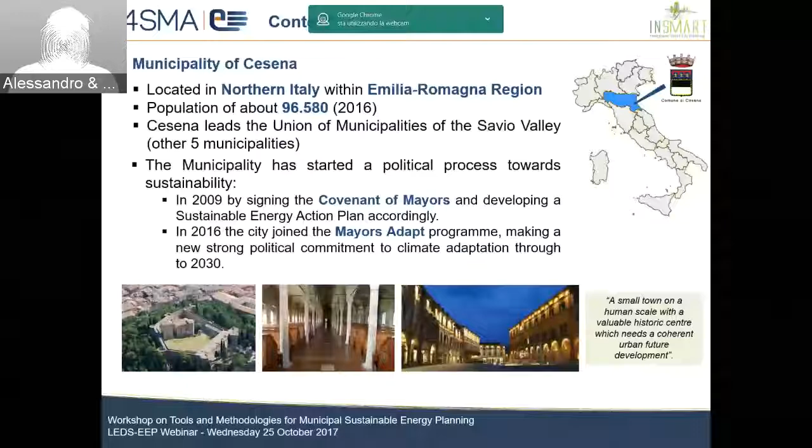So this was basically the starting point: a city which already started its process and was open to try to apply different methodologies for sustainable energy planning. As discussed in the previous webinar, the core of the InSMART methodology is the development of a city planning platform, which is composed of a number of tools and models, which can provide useful information about the current status and trends of the city energy system at many levels, so the infrastructure and the physical, as well as the energy flows of the city.

But as well, this type of tool can provide information about future projections, future trajectories of the key indicators for energy in the city system. So this type of tool can be used to test, for example, different implementation measures, different policy measures, to see which are the effects on the local energy system.

Aside from this methodological approach that is common to all case studies, the key difference is that, for example, the spatial granularity in each case study could be different. In the case of Cesena, we applied a spatial granularity of 15 zones, representing all the different districts across the city. In this way, you can represent not only the overall trend of your city, but you are also able to represent in more detail what's happening in the specific districts, or the type of flows, for example, the number of travels between different districts.

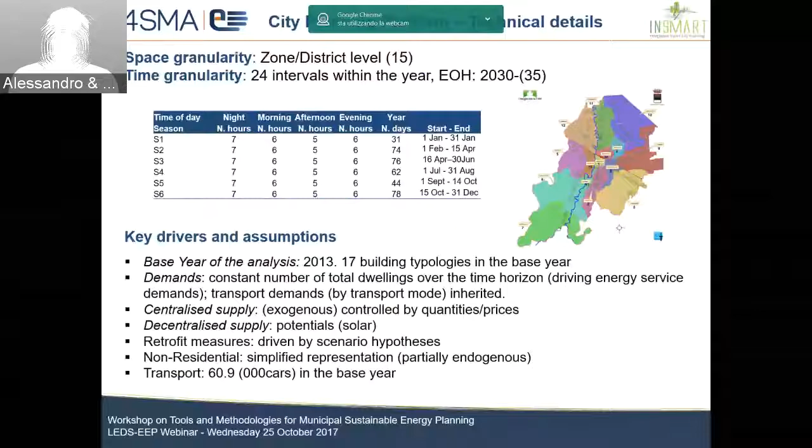According to this tool, the initial phase to start developing an analysis of the future trends for the city was the characterization and identification of possible policy actions in the city. We can summarize the identified actions for the case of Cesena into 5 big groups by topic. For example, one of the key areas of intervention of interest for the municipality is actions related to urban regeneration. So basically, how to retrofit a certain amount of the existing stock and assess the impact on the overall energy dynamics.

Another possible approach could be: okay, let's build a new residential area, for example, and see what's happening in terms of energy patterns, but also how the transportation and mobility needs of the citizens across the city will change given this new urban area. And as well, some sensitivities. So what if the new districts have certain thermal characteristics, specific characteristics in terms of energy consumption and energy saving.

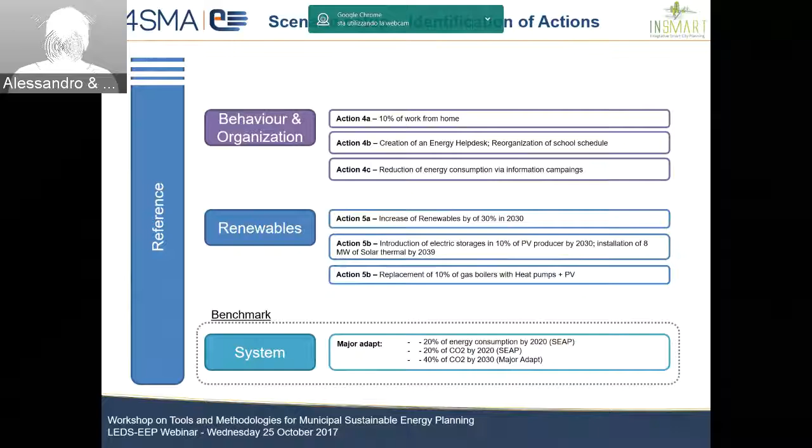A key word of the framework that has been developed within the InSMART project is the integrated approach. So basically, the aim is not only to test a kind of cost-benefit analysis of these single actions, but the idea is to try to build some alternative planning hypotheses which are somehow integrated. As you can see here from the list, there are 6 alternative planning hypotheses for the cities, and each of them has a kind of flavor, a strong direction in a certain direction.

So for example, alternative A will be oriented more on urban regeneration, but at the same time it includes some other actions that are not only related to urban regeneration, for example some measures in transport, some information campaigns and so on.

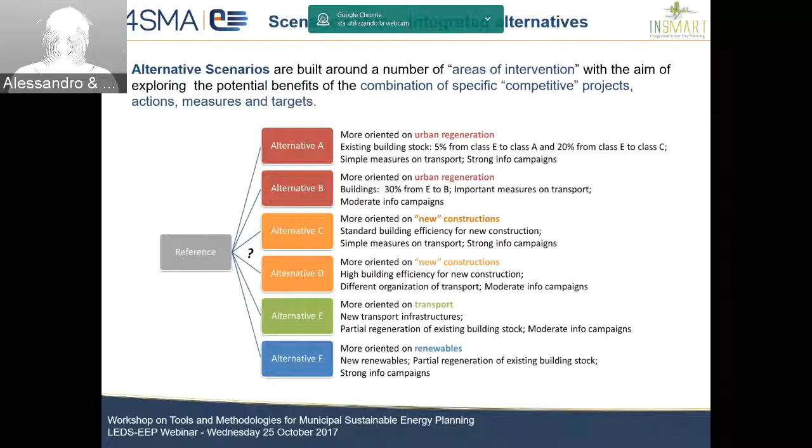Once these scenarios have been identified for the cities, a key point was to try to evaluate how these planning hypotheses could perform under a certain number of criteria. For the city of Cesena, 9 criteria were identified which were found relevant to assess the different planning hypotheses and try to rank these alternatives in order of importance.

Among these 9 criteria, we can identify a few which are completely quantitative, so you can measure them, for example the impact of a certain measure in terms of the reduction of CO2 emissions, or the reduction or increase of particulate emissions and so on.

But at the same time, there are some other criteria which were relevant for the municipality and have been taken into consideration; even if they could not be directly measured, with a kind of rating you can estimate their impact. For example, the impact of certain hypotheses on local development, so the job creation of highly skilled people or not, or the architectonic and aesthetic impact of the new technologies across the city.

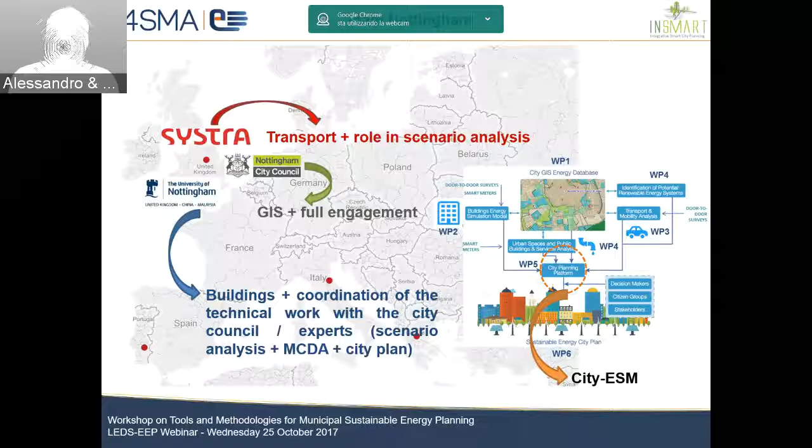All this information, transport analysis, buildings, GIS, was used in a city planning platform, and my role, with the help of Alessandro, was to develop this city planning platform called the City Energy System Model, and the key topic of this presentation is this energy system model for Nottingham. This is the first message we want to share with you: if you want to fully apply the InSMART methodology, you have to make sure that you cover at least some expertise in your team, transport related, building related, and modeling related.

A few key pieces of information about Nottingham. The population is 3 times higher than in the case of Cesena, meaning that the methodology itself is not limited by the number of inhabitants, is not limited by the size of the city, so it's pretty flexible to represent any kind of urban area.

In this specific case study, we used a disaggregation of 20 zones, so 20 districts, but there was a very interesting characteristic. As you can see, there is an inner, core part of the city, which is surrounded by this red circle, which is in fact the city of Nottingham, and is generally geographically delimited by this area in terms of planning for buildings and for the energy system in general.

But for the transport sector, the idea was to extend the geographical representation of the area, so that they could represent explicitly some of the measures for the transport sector, in particular, for example, the investment in some new tram lines or some new high-speed train. So there were 2 levels of analysis and 2 levels of models in this specific case study. One, as a first layer, is about transport, very big, and one integrated transport plus building plus energy system in this blue area, delimited by the red circle, which is much smaller in terms of geographical coverage.

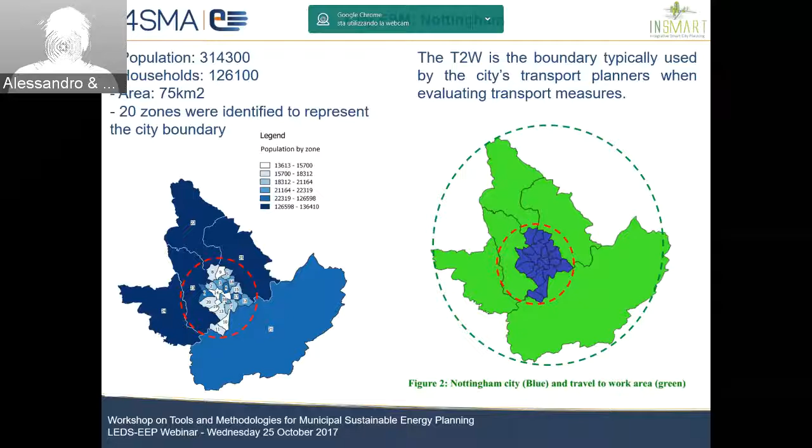A few other characteristics of Nottingham with respect to the case of Cesena. The time granularity here was not very important, meaning that the local stakeholders were not very interested in analyzing the behavior of the energy flows within the year. So we worked with just 6 intervals within the year, just to keep track of the 3 general seasons and 2 slots in the day. The end of the horizon is 2030 with a base year of 2014, so a time of analysis of more or less 16 years.

We identified 16 building typologies for the specific case of Nottingham. And we also considered additional planned housing because the population is going to increase slightly in the coming years. As usual for the InSMART methodology, the centralized supply is not explicitly represented, so we control this information by quantity and prices, while the decentralized supply is fully represented. So we included the potential of solar and the investment in these technologies, and all the elements of scenario related to this decentralized production of electricity and heat, so subsidies, taxation, and different programs.

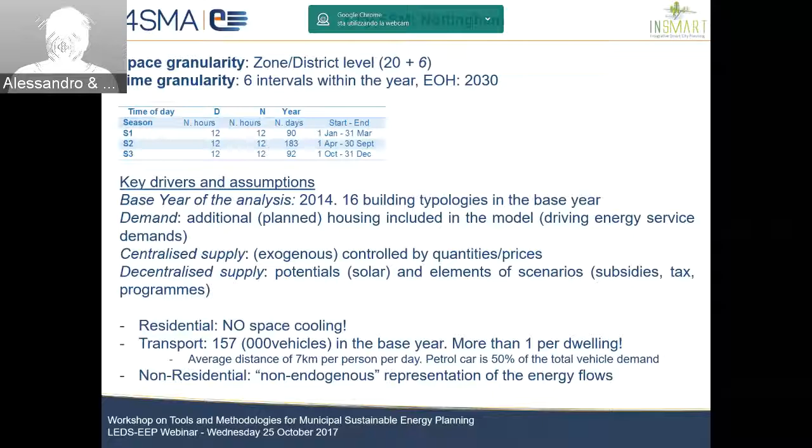And another point is that the non-residential sector in particular was represented in a very simplified way, while the industrial sector was not represented at all. But this is again consistent with the general approach of the InSMART project.

A few more details that you can find here in these charts. In the first one, you can see the dwelling stock by typology divided by 20 zones and by dwelling types, so flat, detached, semi-detached, and terraced. We were also able to break down the stock of the heating system by zone and by type, to divide the dwelling stock by period of construction in order to better simulate the energy performance of these buildings, and of course to break down the consumption by fuel and by zone.

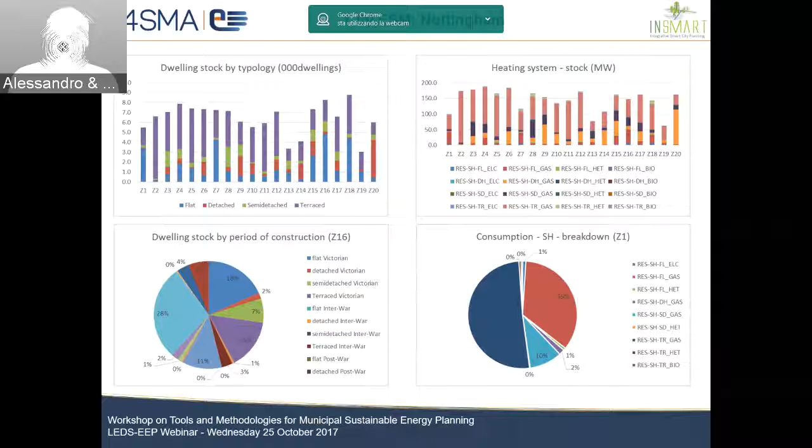So this is just to say that such level of detail was used for describing the base year of the municipality, as well as the future dynamics of the municipality. So the definition of the zones and this level of detail in the representation of the processes was kept along the entire horizon of analysis.

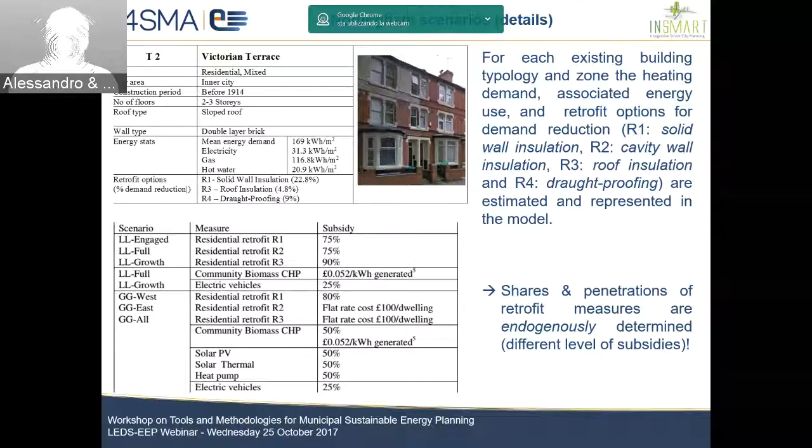Once we prepared this list of alternative planning hypotheses, meaning combinations of different actions or measures in one consistent story, the idea was to run all the simulations and to get a set of quantitative information. The first 5 criteria are basically fully inherited from the runs of the integrated energy system model. So 2 of them are purely economic related, so cost associated to a scenario over the projected time horizon, and the cost efficiency in terms of decarbonization potential, in terms of dollars per ton of CO2.

2 of these criteria are purely energy related, so the energy reduction potential related to the scenario and the low carbon energy generated, meaning, for example, the production of electricity from PV. And the 5th is more environmentally oriented, which is about the reduction of CO2 emissions.

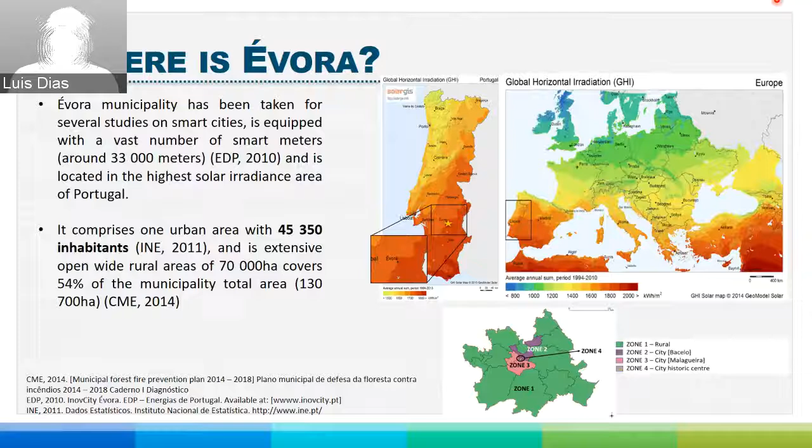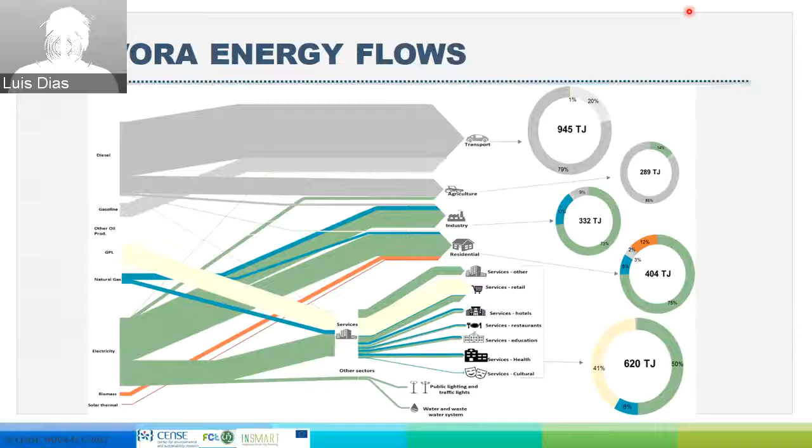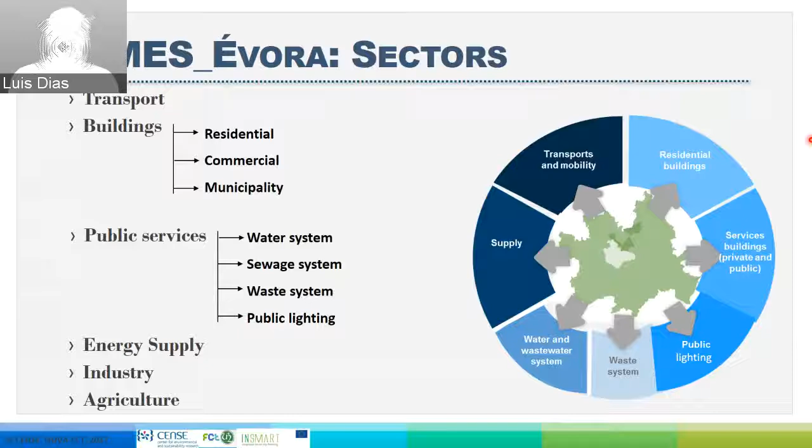Here I want to present in a very simplified way the components of the TIMES Évora model that was developed under the project. It included the transport sector and the buildings, which were divided into residential, commercial, and municipality-managed, and also the public service, as I said in the previous slides. It also characterized the energy supplied to the city, and also the industry and agriculture sectors.

In terms of spatial and geographical representation, for the case of Évora, 4 regions were defined: 3 mainly urban-focused zones that are located here, and one big region that represented the rural part of the city.

In terms of time slices and temporal scales that were applied to the model, it was defined 18 time slices representing the 3 seasons: summer, winter, and interseasonal, and also weekdays and weekends, and divided in day-night peak.

And like Rocco said, for the other 2 cities, this is very important to characterize in terms of energy consumption and also energy production. Here I present 2 examples why this is important. So the model can gather the complementarity of energy supply and the energy consumption sectors. Here it can be seen an example of the PV, the electricity production, and electricity consumption profile of the residential sector. This can represent and try to analyze the complementarity between production and consumption.

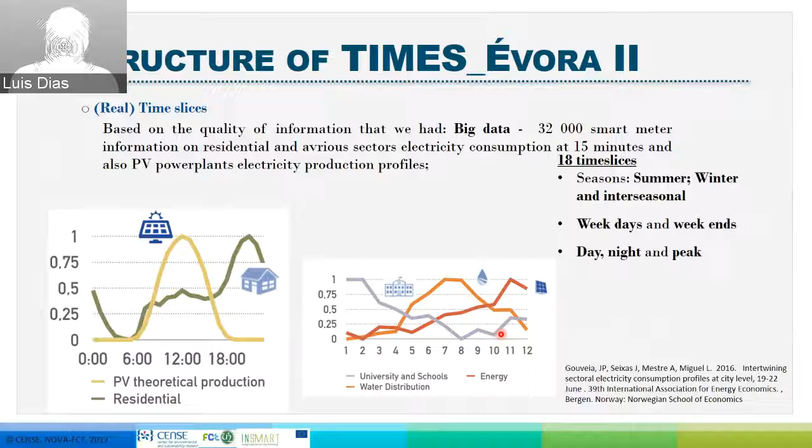Another very important aspect when we are talking about renewable or sustainable energy futures for the cities is to analyze what is the renewable energy and the endogenous potential of the cities. In this matter, under the scope of the project, an assessment was made of the renewable energy source potential in all of the 4 cities.

And just to point out that Évora now has more or less 1 megawatt of PV installed in utility scale, and the potential for utility scale implementation in Évora is 1 gigawatt. So more or less the electricity consumption made by the city can be guaranteed by the installation of PV.

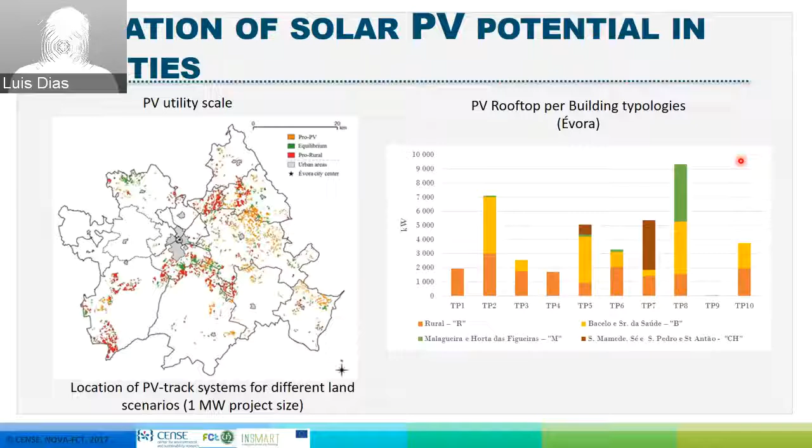Also, an assessment was made on the PV rooftop potential in Évora, and it was also divided in different regions and between different building typologies. So this allows us to identify in a very detailed way the PV potential for each of the buildings and in each of the regions.

Here I just want to zoom in on the building sector, in particular the residential sector, where last week I presented a webinar on the data collection, and one of the key methods that was applied to gather information on the residential sector was the door-to-door surveys. And here I just want to emphasize that these door-to-door surveys were very exhaustive, 110 questions that go from building characterization to the building occupancy characteristics, and also the technology owned.

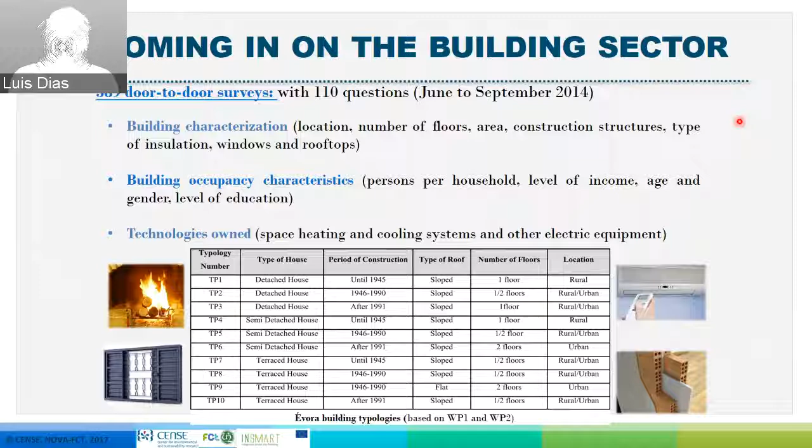This allows us to make a very robust characterization of the residential sector, and we divided the houses into 10 building typologies, and also we used some of the other information in terms of persons per household or level of income to make some restrictions or adjustments on the measures that we wanted to test.

Here is to show the modeling approach that was made. Like I was saying, there were 10 building typologies defined by the building characterization, and for each building typology and in each of the 4 city regions, it was characterized in terms of technology ownership, from all these types of technologies, from refrigerators to dishwashers, and even each of these technologies was divided in energy efficiency classes and by type of fuel.

Why is this important? Because these types of models are very technology rich. So when we make some scenarios for 2030, it takes into account the current stock of technologies and looks at the replacement of these technologies with the portfolio of new technologies in terms of investment costs and also efficiency. So if in the base year 2013 one building typology has a refrigerator that is very low in energy efficiency class, in 2030 it can be replaced by a more efficient one.

And also very important was the characterization of the mobility. The mobility was linked to the building typologies in terms of characterization of the type of technology that each of the households have, characterizing the technology by type of fuel and by age. And also with the information gathered from the survey made for the mobility analysis, it was possible to point out the origin and destination of the people that live in these houses.

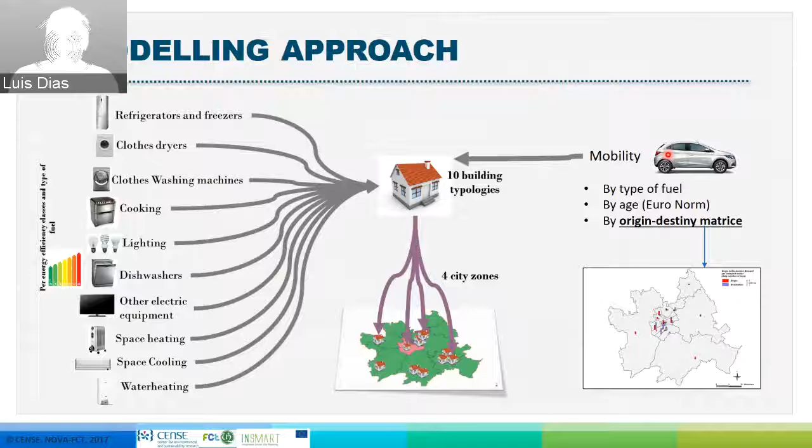So more or less it was very detailed and it was able to make some adjustments on the mobility of the people that go to the city center, and if they have cars, then the city center is constrained to this specific type of cars, and what was the choice that people had in this matter.

So just to point out the visions that were developed for Évora, it is also important to point out that all these visions and all the scenarios and all the measures that were made under these projects, and I will present them in the next few slides, were always taking into consideration the opinions and the feedback of the municipality teams or the local teams, and also the stakeholders of the city. This was not made purely in terms of technical sides from the universities or the technical partners. It was taken into consideration what are the opinions of the local stakeholders in terms of what are the visions for the municipality in the future in 2030.

So with this said, we made two different visions for Évora. One is the reference, and the other one is a smart Évora vision. The reference is a much more pessimistic perspective for Évora, where the population decreases. There is no change on energy consumption profiles, although there is a new commercial mall in the city that is very important for the municipality population. So you can see here the new commercial mall is not a technical aspect, it was local feedback.

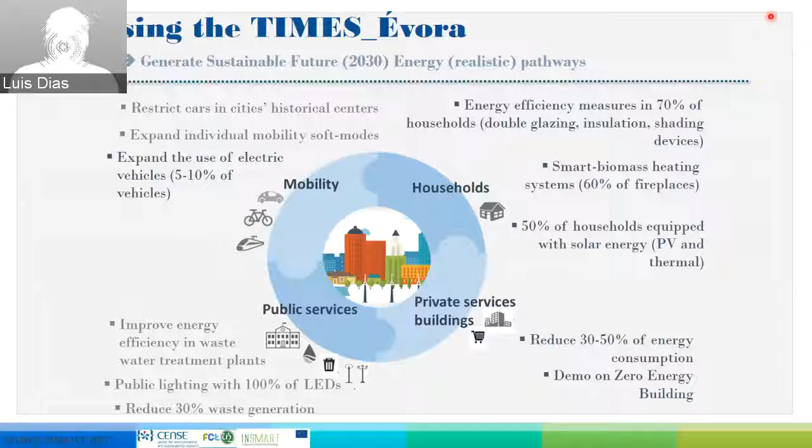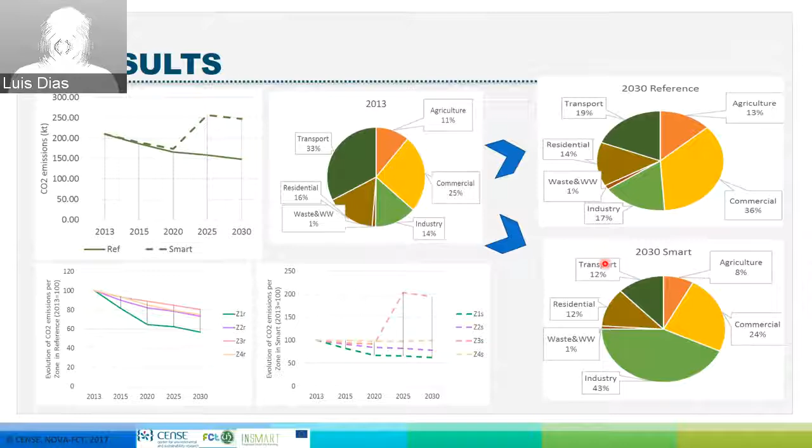A very important aspect of the InSMART methodology was the inclusion of the local stakeholders. The engagement of the stakeholders took place in various workshops, and the workshops were first of all to define the future technology and measures towards a low carbon city, and also to validate these measures, and, very important in fact, to analyze the criteria that allow us to rank the different measures. And like Rocco and Alessandro showed, the criteria are different between cities. For the case of Évora, 6 criteria were defined, from quantitative to qualitative.

In terms of quantitative, there is reduction of energy consumption, greenhouse gas emission, and financial effort, because the tool allows us to see the amount of investment that is needed for specific measures, and also some qualitative ones in terms of contribution to improvement of comfort or quality of life of the residents. These criteria were provided by the local stakeholders, and the weight of each of the criteria was also provided by the stakeholders. This allowed us to make a rank of the more important, more feasible, or more realistic measures for the case of Évora.